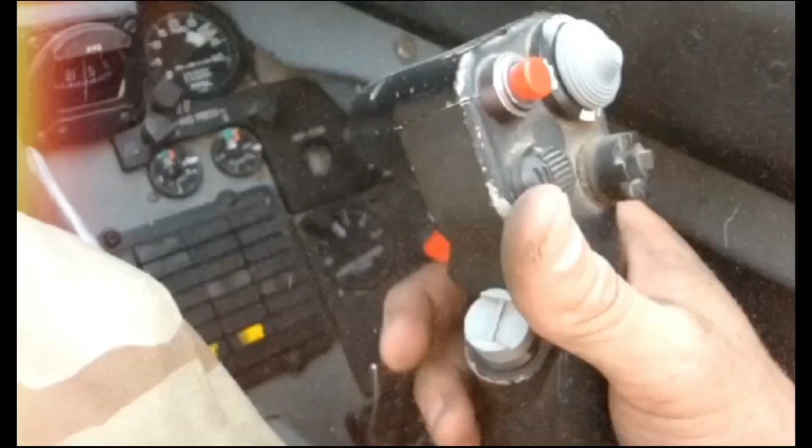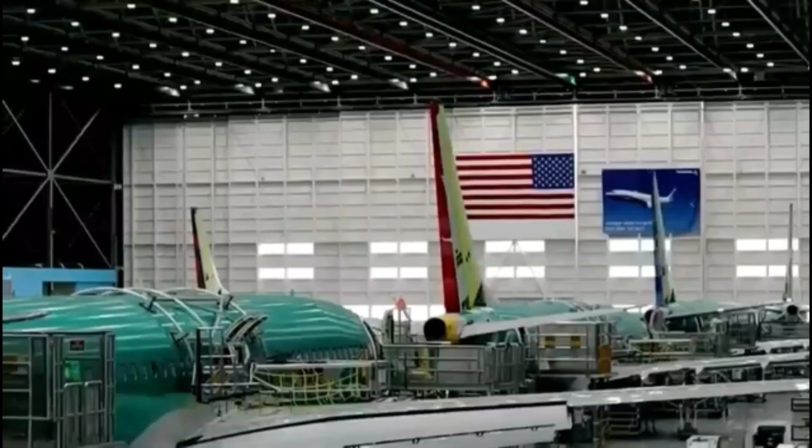Today we're delving into a critical issue that has recently surfaced in Boeing's 737 production. It's a complex situation, and we're going to break it down step by step, exploring not only what's happening, but also the potential implications for both Boeing and its key supplier, Spirit AeroSystems.

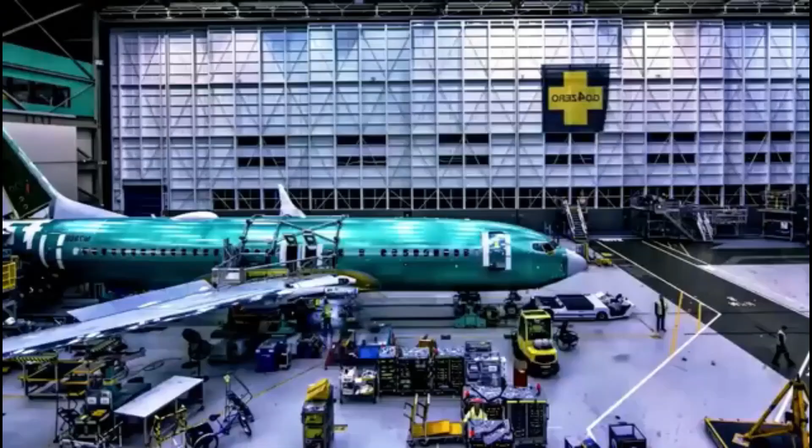The Boeing 737, often referred to as Boeing's workhorse, has encountered some production challenges that demand our attention. In this video, we'll unravel the intricacies of these issues, starting with the expansion of Boeing's production lines in Everett, Washington. Boeing's production expansion.

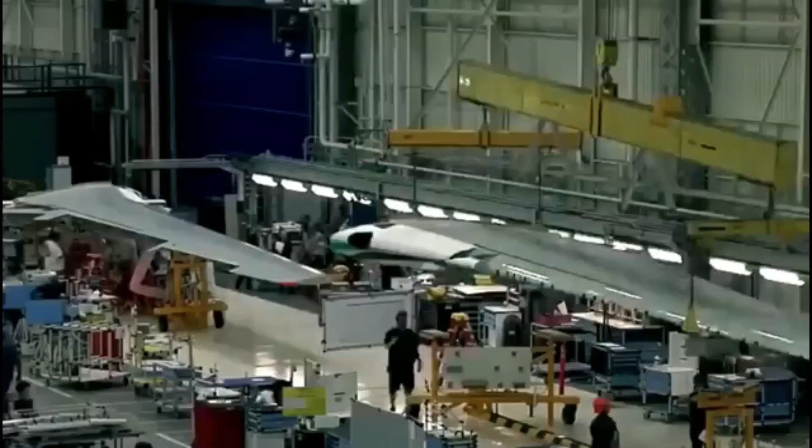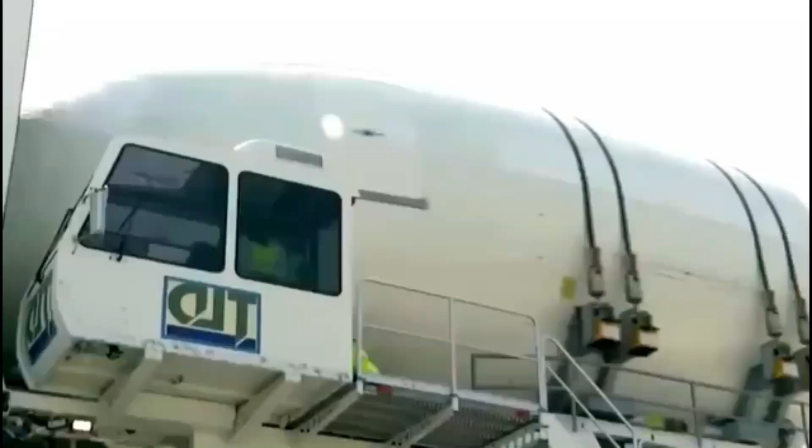Boeing, recognizing the surging demand for the 737, decided to open a fourth production line in Everett, alongside their existing 3 lines in Renton. This move aimed to increase output and match the soaring demand for these aircraft, especially with Airbus making strides in A320 production.

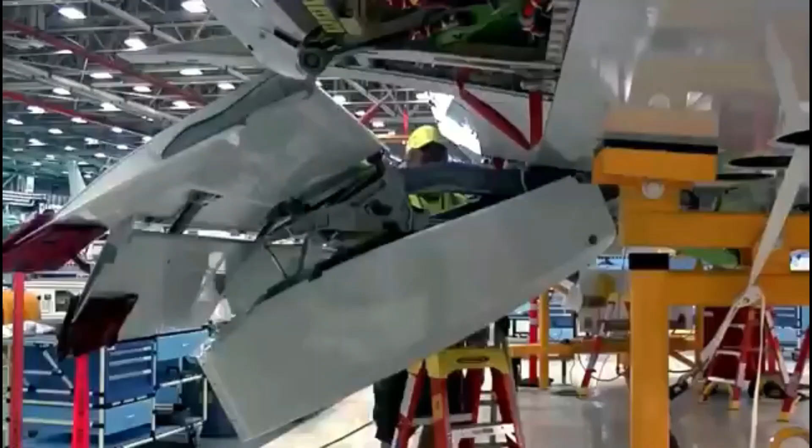However, the logistical challenges of transporting 737 parts from Renton to Everett turned out to be more formidable than anticipated. The need to ship various 737 parts, ranging from relatively small components to massive wings manufactured in Renton, posed a significant challenge. The absence of a direct railway connection, compounded by the historical removal of a former link between the two sites, made the transportation of these parts a daunting task.

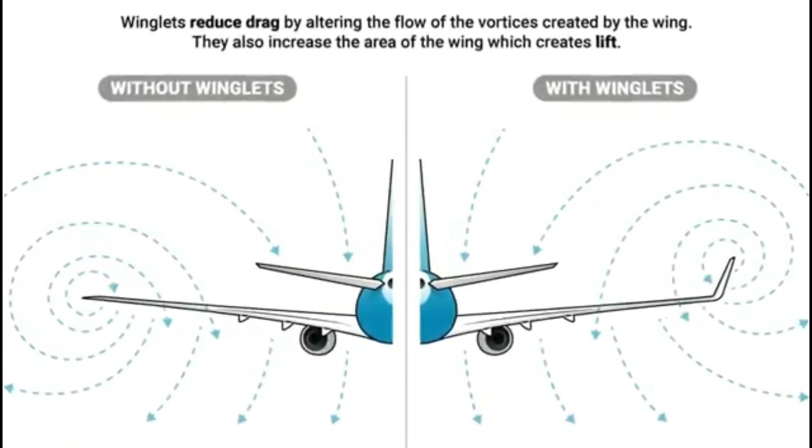Boeing was now faced with the challenge of finding alternative transportation solutions and developing new packaging methods, particularly for the substantial wings. Boeing's strategies for overcoming logistic challenges.

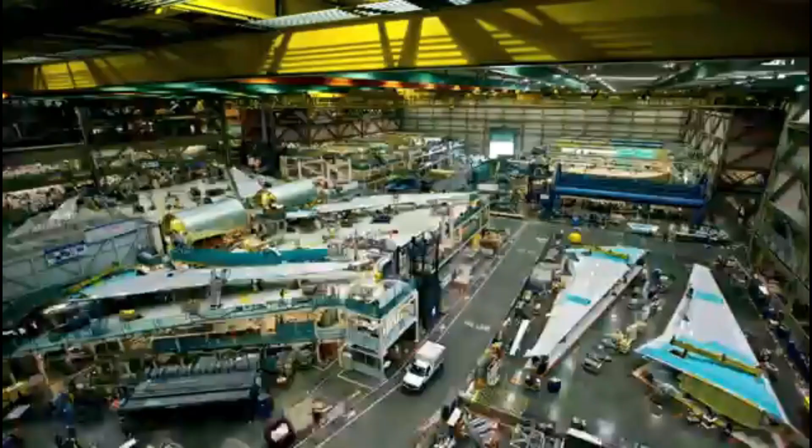To address these challenges, Boeing has employed a multifaceted strategy. They are exploring innovative packaging methods for the transportation of wings and other sizable components, considering the use of specialized containers and exploring partnerships with transportation companies. Additionally, Boeing is investing in research and development to optimize the shipping process and reduce potential delays.

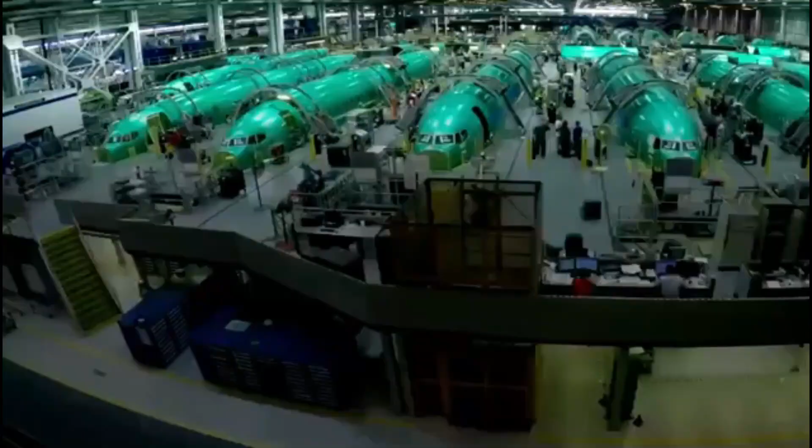The role of Spirit AeroSystems. Now let's shift our focus to the heart of the 737, its fuselage. Boeing, unlike Airbus, doesn't produce its own fuselages. Instead, it relies on a subcontractor, Spirit AeroSystems. Based in Wichita, Kansas, Spirit plays a crucial role in Boeing's supply chain, manufacturing 70% of the 737 structure, including the entire fuselage.

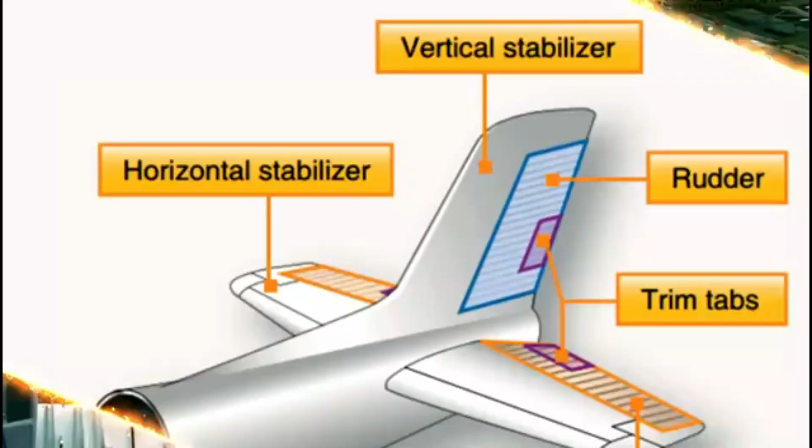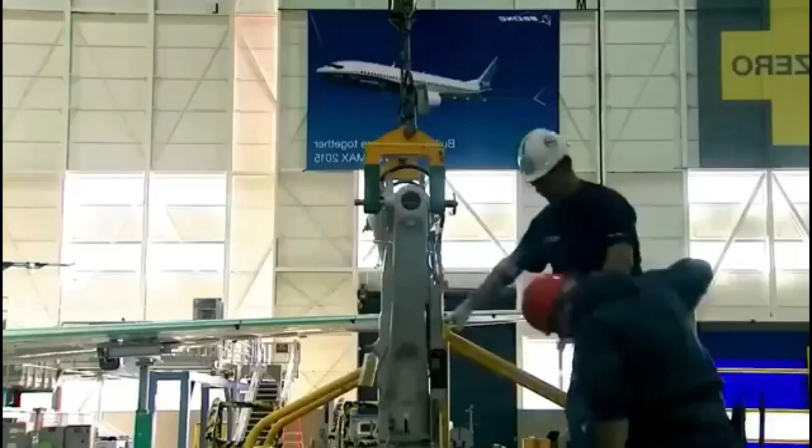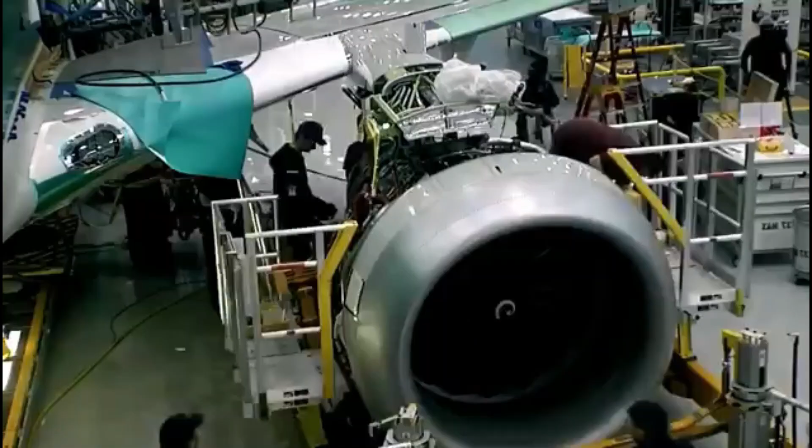Issues with vertical stabilizer fittings. Recently, production issues emerged, notably with the fitting of the vertical stabilizer. A keen-eyed employee at Spirit noticed discrepancies in the manufacturing and installation of these fittings on multiple 737 fuselages. This issue, affecting all 737 types in production, including the military P-8A Poseidon, dates back to 2019.

Although the FAA deemed it non-safety critical, the financial burden for repairs was substantial, estimated at $100,000 to $150,000 per aircraft. Impact on production timeline.

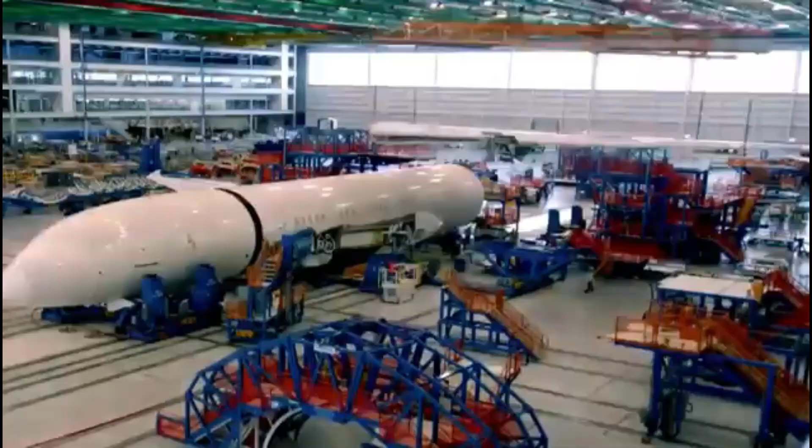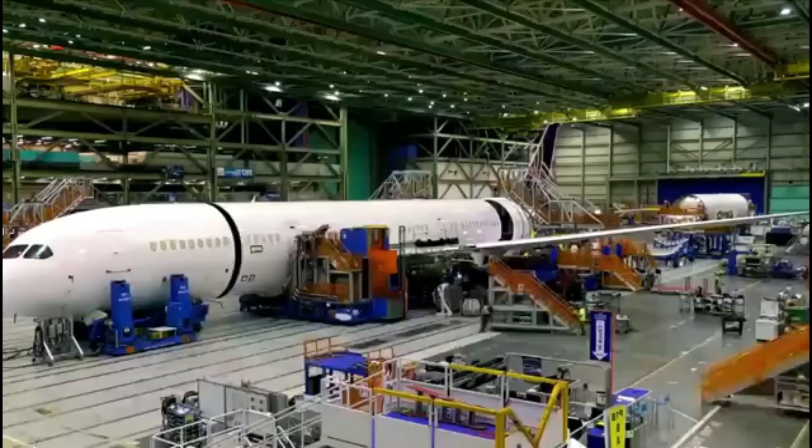The identified issues with the vertical stabilizer fittings have led to significant delays in the production timeline. The meticulous nature of the required repairs, coupled with the need for thorough inspections, has impacted the delivery schedule for multiple 737s. This delay is particularly challenging given the current surge in travel demand and the competitive landscape with Airbus.

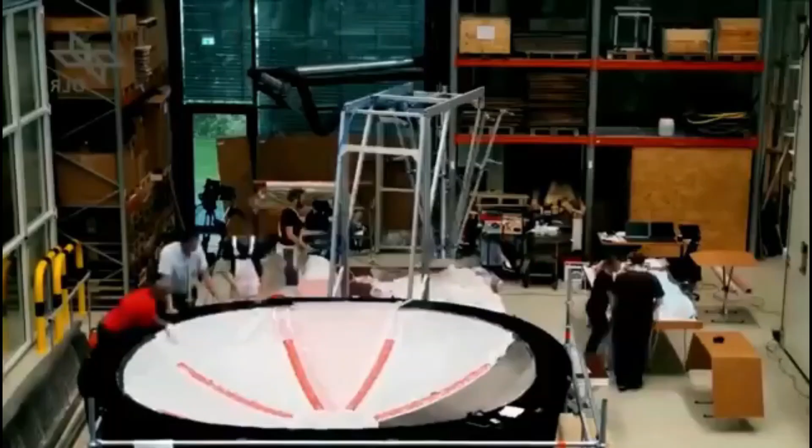Snowman holes in fuselage. Another concern involves elongated holes, known as snowman holes, discovered in the aft part of the fuselage. These holes were found in the rivets covering the aft pressure bulkhead, a critical component ensuring the structural integrity of the pressurized fuselage. While not classified as a safety issue, the repairs were challenging, requiring meticulous inspection and, in some cases, significant disassembly of completed or nearly completed aircraft.

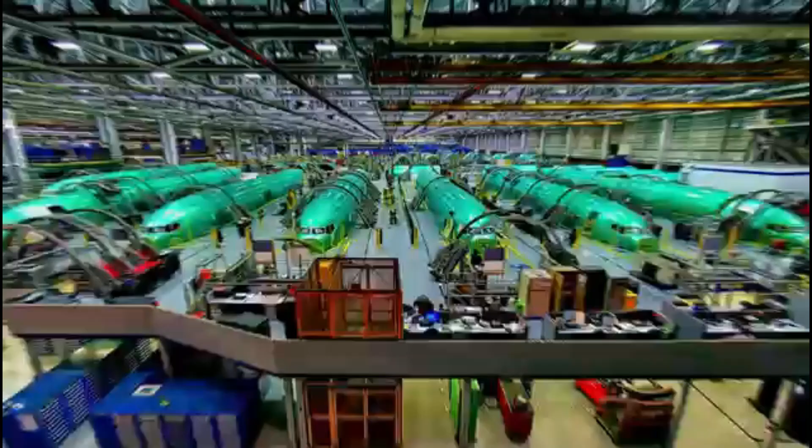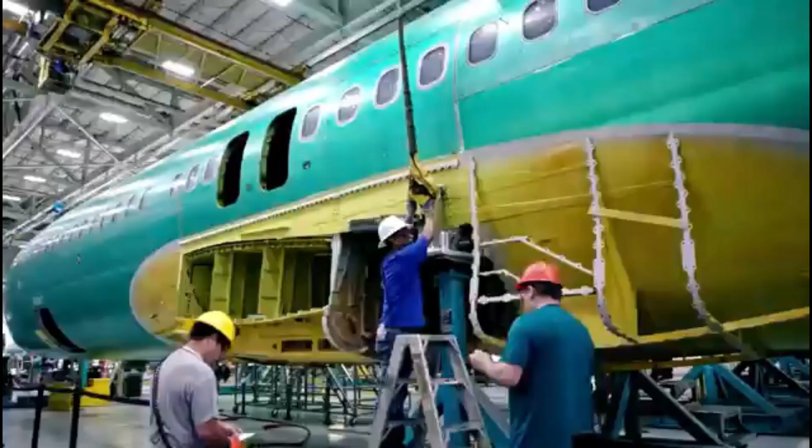Supplier dynamics, Boeing and Spirit AeroSystems. To understand the full picture, we need to explore the dynamics between Boeing and Spirit AeroSystems. Boeing's decision to divest certain manufacturing sites, including Wichita, in 2005 led to the creation of Spirit AeroSystems as an independent entity. However, Spirit's intertwined history with Boeing, dating back to World War II, remains evident.

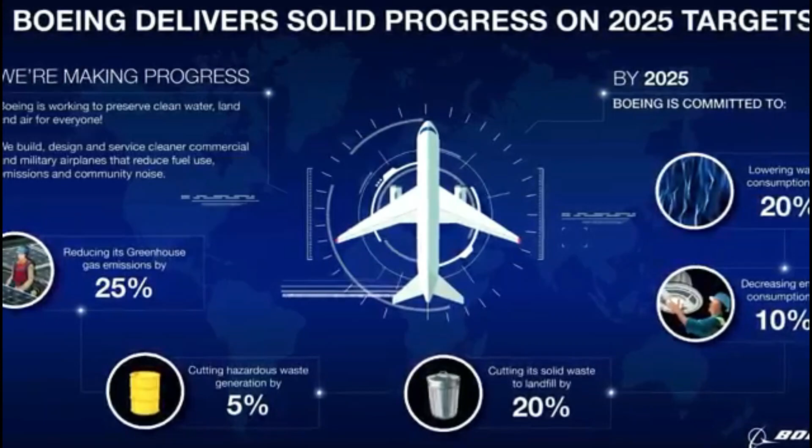The recent challenges faced by Spirit have raised questions about the wisdom of Boeing's divestiture strategy. Financial impact and supplier relations.

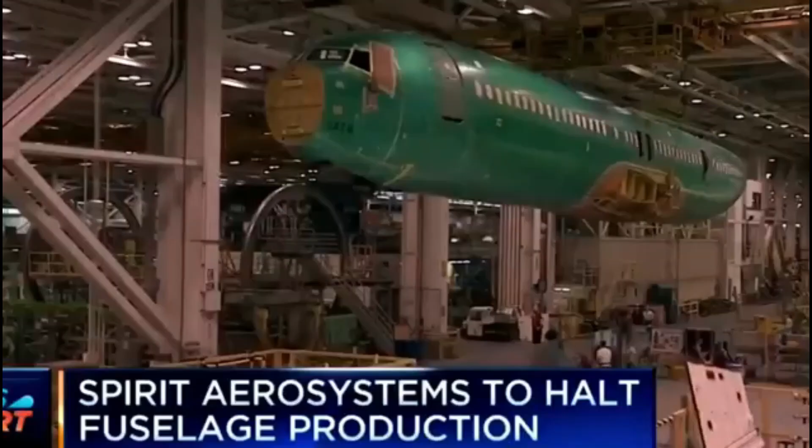The financial impact of these production issues has been substantial for both Boeing and Spirit AeroSystems. Repairs, additional charges, and the need for a new contract with the workforce have strained Spirit's financial outlook. The close interdependence between the two companies underscores the critical importance of effective supplier relations in the aerospace industry.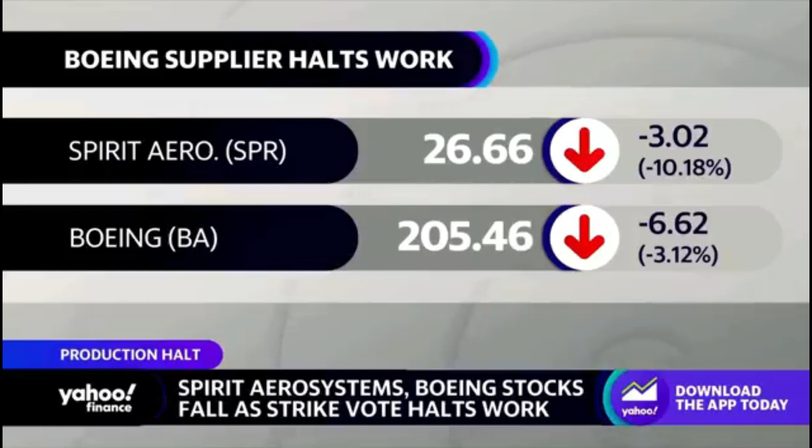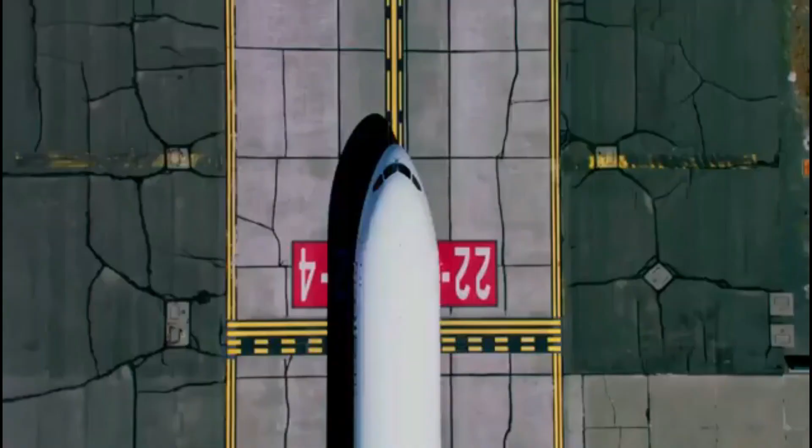Collaborative solutions. In response to the challenges faced by Spirit AeroSystems, Boeing is actively collaborating with its longtime partner to devise solutions. Joint task forces have been established to streamline communication and enhance collaboration in addressing the identified issues. This collaborative approach aims to not only resolve immediate concerns, but also foster a resilient and mutually beneficial supplier relationship.

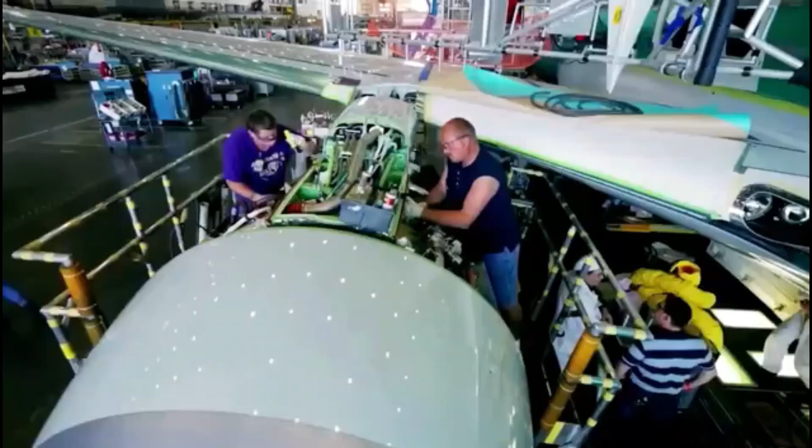Why did Boeing divest? To truly understand why Boeing divested its manufacturing sites, including Wichita in 2005, we must delve into the changes that followed the acquisition of McDonnell Douglas in the late 1990s. Boeing's shift in focus from manufacturing parts to assembling complete aircraft was a strategic decision aimed at improving financial performance and shareholder value, albeit one that some critics argue may have contributed to the current challenges.

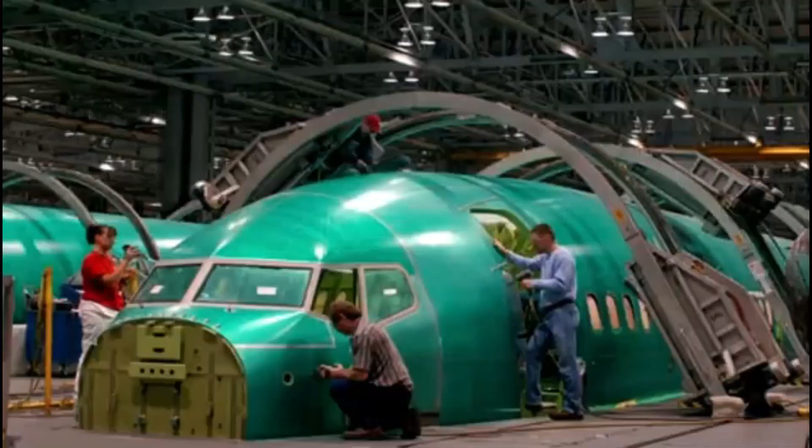Spirit's evolution. Spirit AeroSystems, post-divestiture, underwent significant changes. The company actively sought contracts beyond Boeing, acquiring aerostructures divisions from BAE Systems and expanding its presence in Europe. Despite these strides, Boeing remains Spirit's primary customer, accounting for a substantial portion of its revenue. The question arises, could Boeing absorb Spirit back into its operations, given their intertwined history and current challenges?

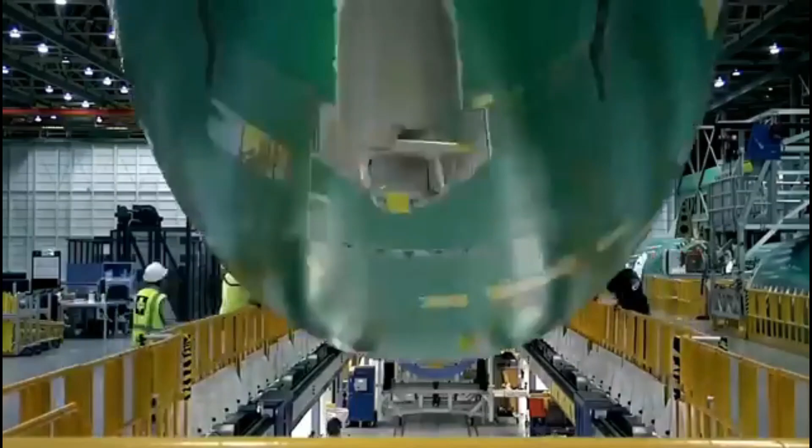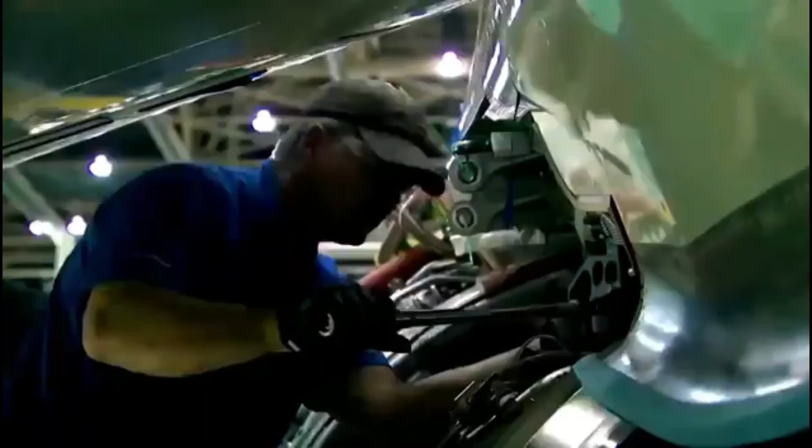Current outlook and future challenges. As we wrap up, it's crucial to highlight that while Boeing and Spirit are working to address these challenges, the aerospace industry is watching closely. The impact of these issues on the ongoing production of the 737, as well as the potential for future delays, raises questions about the long-term viability of Boeing's production strategy.

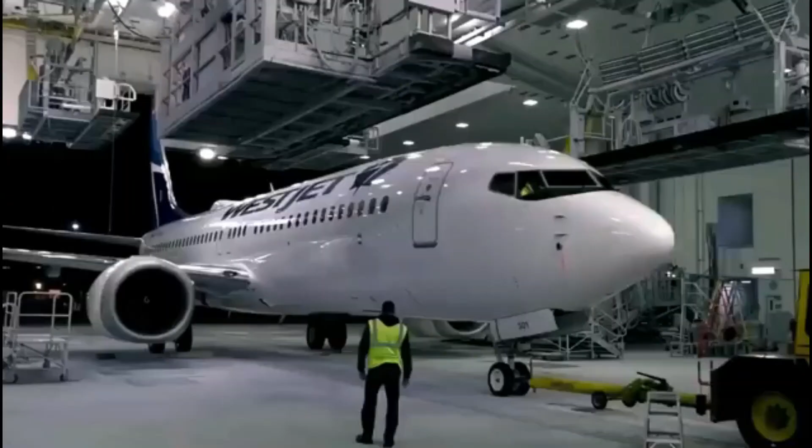So there you have it, a detailed exploration of Boeing's recent production challenges, the complexities of supplier relationships, and the historical decisions that shaped the aerospace landscape. As always, stay tuned for updates on this evolving situation.